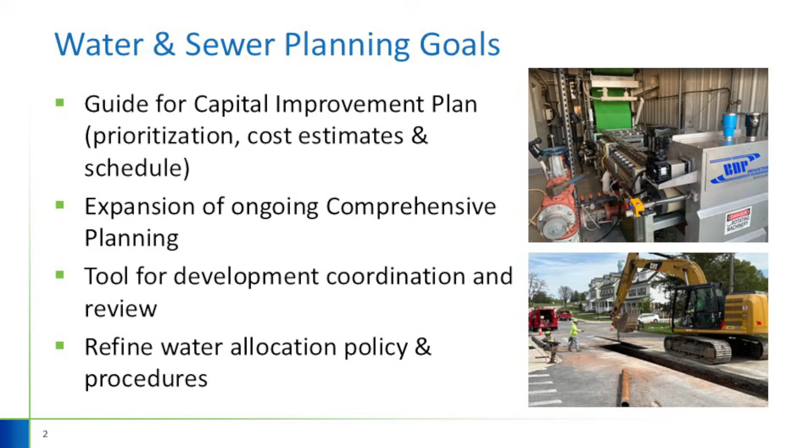Again, this gets into slides you've seen before, but just a real quick history of the timeline. The wastewater treatment plant's original plant was built in the 50s. The biological nutrient removal plant, BNR plant, was built in 2000, and then that was upgraded in the 2010s to ENR—enhanced nutrient removal limits—through the biomag process. That finished construction around 2016, and there were compliance issues soon thereafter. So there was a period from 2020 to 2023 where we were working with plant staff and other professionals to get the plant up to compliance and running as it should. I have more detail about that in a second. Most recently, there were the dewatering improvements to replace the belt filter press.

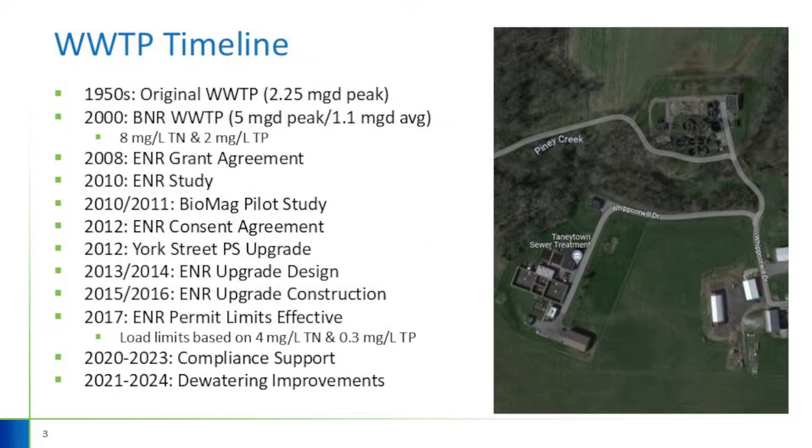Sorry, can we pause for a second? Yep, absolutely. I'm just trying to connect dots. So when you say the ENR load limits are based on 4 milligrams per liter TN, that's the nitrogen and phosphorus reports we get in our packets—that's what this is basically referencing, right? Okay, cool. Yeah, so the BNR had levels of 8 TN, total nitrogen, and 2 total phosphorus. That's the biological nutrient limit, a standard set by the state. All the plants have been required—major plants and now minor plants—to reach that 4 and 0.3.

So quite a big reduction from where they were, and it's starting to approach the limit of technology. I'm not saying it's at the limit of technology, but there is a limit to how far you can get with those. And operating an ENR level plant doesn't allow a whole lot of room for error. You got to be on your game.

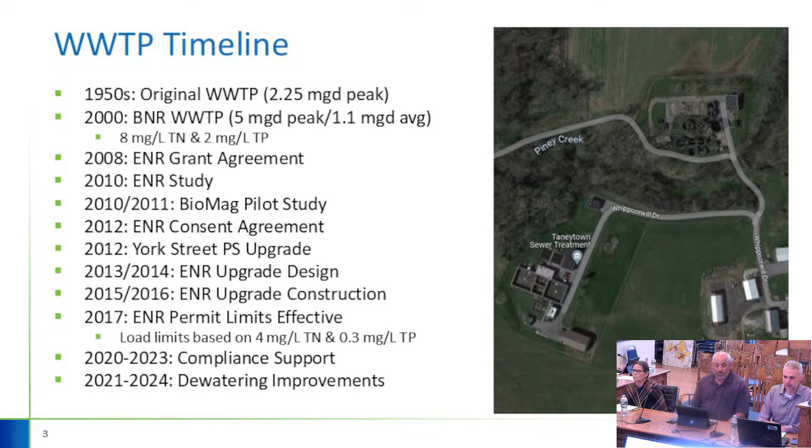Okay, so those compliance issues, and again, this is looking backwards. We looked at both items at the plant and then items in the collection system. It's the wet weather flows from the collection system that are one of the primary drivers for problems at the plant.

So you can see in the wet weather flows, minimum month is around 500,000 gallons a day, which is in the neighborhood of what the water production is. You can see though that the average daily flow was 0.8, and there was a max day several years ago of 5.2. So you can see the impact that wet weather has on flows to the plant, and then that trickles down, and then there's phosphorus and nitrogen difficulties as well. So really solving those problems in the collection system goes a long way to solving your compliance issues at the plant.

And I'll also point out that the load limits for total nitrogen and total phosphorus are flow-based. So even though it's an annual load that the plant is given, you really have to hit the concentrations of 4 and 0.3 if you want to make your load requirement for the year.

Sorry, can you go back? Sure thing.

Sanitary sewer system, terracotta and PVC, long-term issue since the 80s. Can you expand on that? Like, what are we talking about?

Yeah, absolutely. So a lot of the downtown area, older parts of the system were built with terracotta pipe. That's what was constructed in the 50s and 60s. And clay pipe, kind of picture like drain tile type pipe, it's brittle. I've heard rumors that the pipe used in Taneytown wasn't even glazed properly. I don't know if that's true, but it would allow water to kind of get through it. But mainly it's the cracks. It's just brittle, and so that has been an issue that's faced the city since the 1980s.

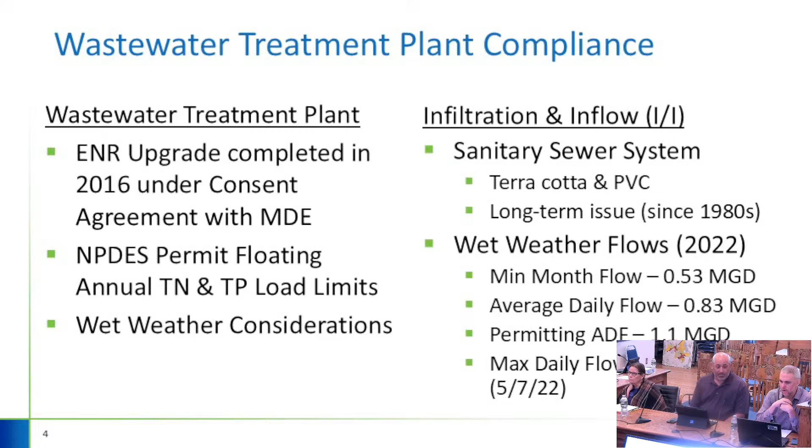These were some, I'm not going to read through all these, but there were a number of initiatives at the plant specifically where we looked at improving redundancy, reliability of the plant, maintenance of equipment, making sure that we had spares, things like that, in addition to the work that was in the collection system.

At the time, we had replaced 2,600 feet of pipe and lined over 4,000 feet, and that's the terracotta pipe. And there's a slide or two that shows where all the terracotta pipe is in the city system, and it's a long-range plan and interest to line or replace all of it.

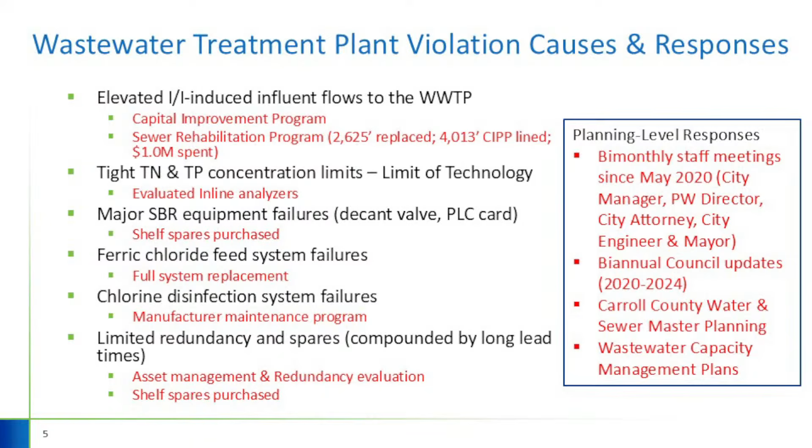These are the charts you were referring to, which you probably saw back in the January or February meeting. It showed how the plant staff effectively met the limit last year. Early in the year, when flows were higher, they trended right on the limit, but as the year went on and flows were lower, operations went well, and the plant ended comfortably below their limit for both nitrogen and phosphorus.

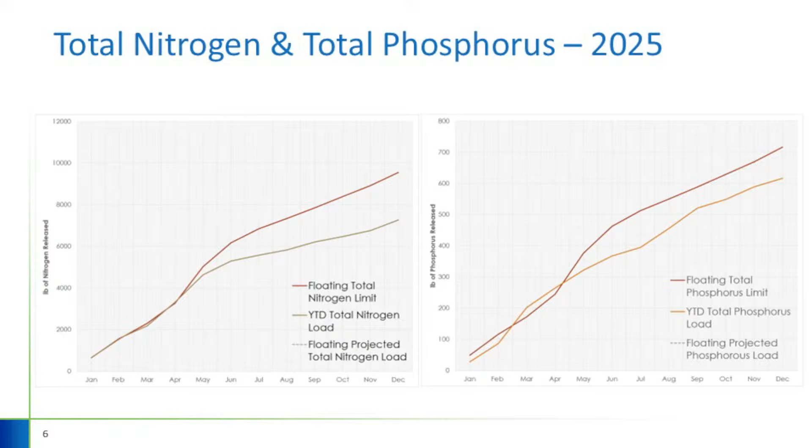So far this year, things are trending on permit pace, very similar to last year. This will be three years in a row now, 23, 24, 25, that the limits were all met.

We just submitted for an O&M grant through MDE. If you make permit, you apply for it, and per size of plant, in our case we'd get $33,000 back. It's based on which plants do how good, so we met, but we still may not get that money. It's been submitted this week, and we have until June to get it in.

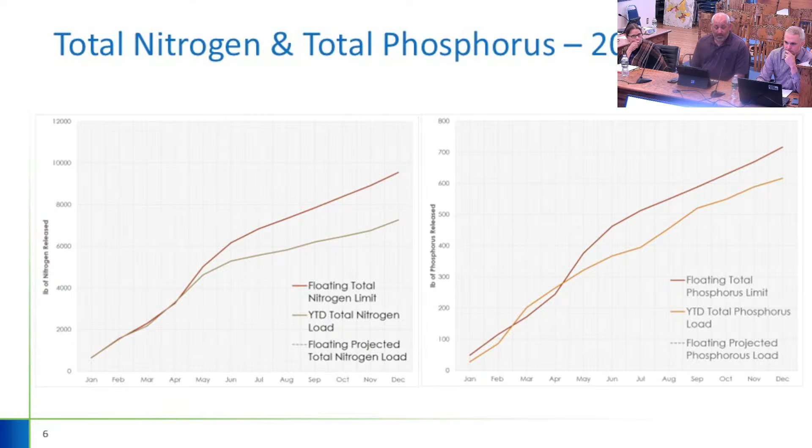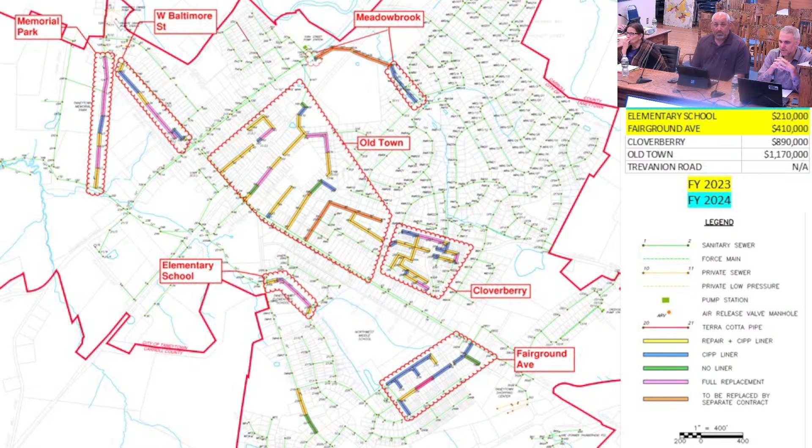This is the terracotta pipe rehab figure I was referring to. These were all the project areas identified, all the terracotta pipe that was identified. A number of these areas have been completed. Meadowbrook, in the top right corner, shows the projects as we broke them out. They were prioritized based on the level of I&I they were thought to be contributing.

The higher contributors, and also the easier projects to tackle, were at the top of the list. Meadowbrook is kind of low-lying by that drainage through there, and we found a lot of leaks that were repaired. Same deal around the elementary school. Those projects were completed. So what's left is what we call the Old Town area, places like Middle Street, George Street, and Cloverberry, which is tight and will be a challenging project when that comes.

There are projects that still need to happen, and that are to some degree in your capital improvements plan, I believe. Is that right, Jim? Old Town and Cloverberry are yet to be done.

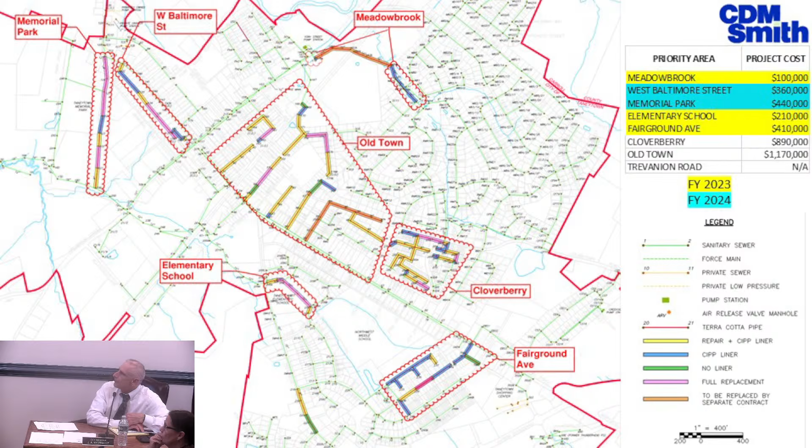We've done the Memorial Park Interceptor. West Baltimore Street was also done last year, and Fairground has had those point repairs done. But the part with Old Town to replace by separate contract, that's what we already did with the ARPA, right? Some of it, yeah, Roberts Mill Road and Broad Street. We still have Middle Street, George Street, Franklin, and Antrim Street.

Does the figure for Old Town still count the part that we've done? In the capital improvement plan, it would not. Okay, I suppose in this case, this figure does, it's shown in there.

Are we seeing any kind of increased water loss year over year with this system? Yeah, we definitely see lower flows, but it's still out there. It's a notoriously difficult item to track because there are so many factors, the actual flow, the groundwater levels. You can't just say a 2-inch rainstorm will have the same effect, because conditions are always different. It's a hard thing to track, but it's been a while since we've done flow monitoring, so it would be a consideration to maybe do a flow monitoring study to compare back to what was done five or six years ago.

My concern is increased expenses year over year from water loss, as well as if you're repairing it versus replacing it, you're just pushing it down the road. So if we have water loss, that would obviously be a concern for our residents.

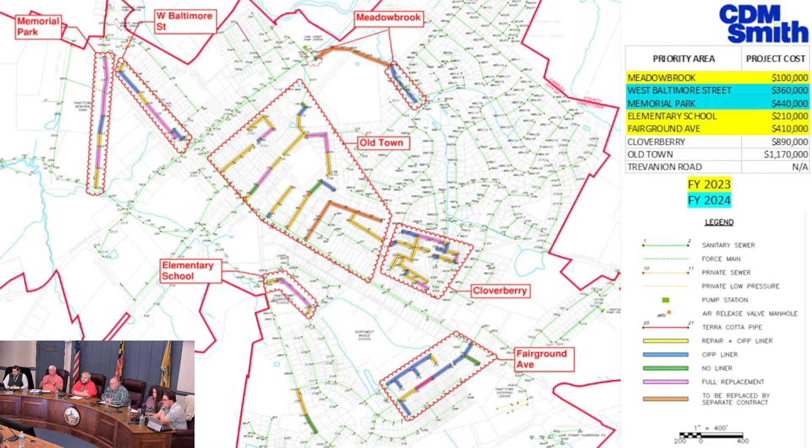Cloverberry is going to be close, because the sewer line mains in those properties are within 10 feet of the townhouses, so we're extremely tight with space there.

As long as the line is acceptable, because we'll do a survey and see if the line falls within the criteria where we do not have to dig and replace, we can use that liner. That's the other thing, we would rather line than dig and replace, it's a lot cheaper.

When we say line, just to clarify, it's the technology we've used to date that uses the existing pipe as a host pipe, and a membrane or resin-filled sock gets placed down into that line, inflated, cured, and then the pipe left inside the host pipe is structurally strong. The host pipe itself basically just becomes a host, it could break away and provides no reinforcement on its own.

Liner itself is structural. You guys hang on after the meeting, I will go grab a piece that was cured and cut out for testing. I have a piece in my office.

It actually looks like PVC. Yeah, because once it's done, I've seen a lot of videos of those being implemented recently.

Not to say it's a factor in some of these costs, but looking over the stuff we had on Trevanion, for instance, we had to tear down the fence to access some of that stuff in the back there. That's also an expense council has to remember—some of that stuff we do, we have to replace whatever we took down to do it. So those fences we have to replace add to the cost as we're going through the residential neighborhoods.

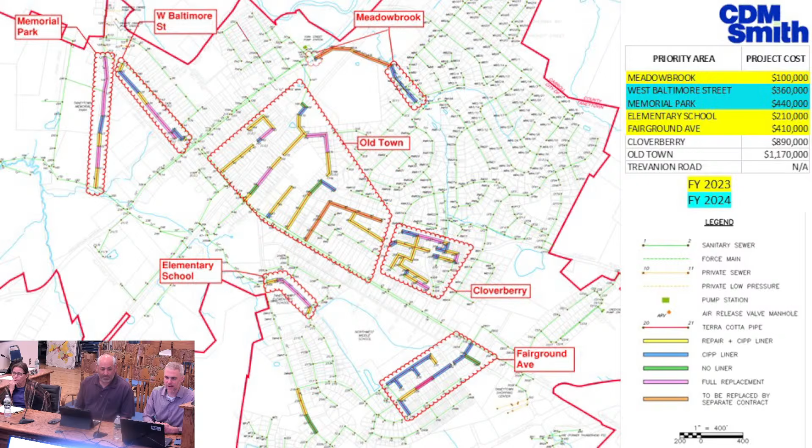All right, so we've touched on some of this already, but as far as thinking again back to the goals, from a sewer perspective - and this is kind of mirrored in that draft proposal discussed earlier - planning considerations around sewer would be around plant capacity, so looking at growth areas and the impact on the plants, looking at I&I, all those sort of things - what does the plant capacity look like?

Effluent reuse is something that's come up a couple times, just lightly, in conversation. The idea there is it's water reuse - higher level treatment for potential other uses of your effluent other than discharging it down the creek. Maybe that's something the city is interested in. Any water that doesn't go down the creek also doesn't count against your permit, your load for nitrogen and phosphorus, so that's an added benefit.

What are we talking about here? The idea of your wet effluent, so that's what leaves the plant. You can reuse that in some areas of the country where they use it for drinking water, fertilizer and all kinds of stuff. Use it for golf course irrigation, park irrigation, industrial uses.

There's indirect ways you can reuse it for potable water. Indirect potable reuse, if you want to go really far, not too Westminster. Yes, that's what I thought we were talking about, but I wanted to make sure I was on the same page.

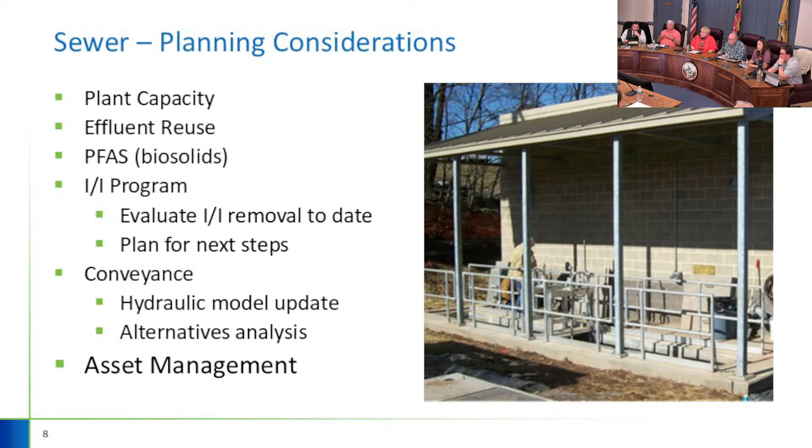I'm gonna tell you, you're gonna see some coming right from runoff and stormwater. When you're using nonstick pans, older pans that are scratched, you're getting PFAS from your clothing, your water bottle - the Teflon stuff, yeah. My water bottle has it, so.

Yes, everything has microscopic amounts going in from everybody's home. I mean, it's in everything you have, every product you have. But there are limits, and there are some in the wells.

I mean, one of our wells has been turned off for almost 4 years now because it exceeded the limit. So that's part of the projects we're doing now.

We have grants for putting treatment on 3 of our wells. I know the one we talked about is the one that's been off. Well 12 is going to catch because Well 11 is where we're putting both of those, getting treated at the same site, yeah.

The grants that we have there are principal forgiveness, so we're just going to be paying interest on it. So they are giving money, but we're paying interest for 10 years, and after 10 years the principal disappears. So it'll show on our books as a loan, but after 10 years that will go away. We're just paying interest for those 10 years.

Again, is that locked in? Like, there's no chance of something happening at the state level? They're not awarded yet, right? But those two grants are.

So they're contract bound, that as long as we do our part, they do their part? I don't think we've got to - we have not, we are working on an RFP right now with CDM Smith.

But I guess my question is the part from the state, the principal forgiveness part - is that locked in? There's no chance of that being stripped down the road or anything like that? Has anybody taken a look at the wording language, I guess? I highly doubt it would, but you never know because of what's going on state budget wise.

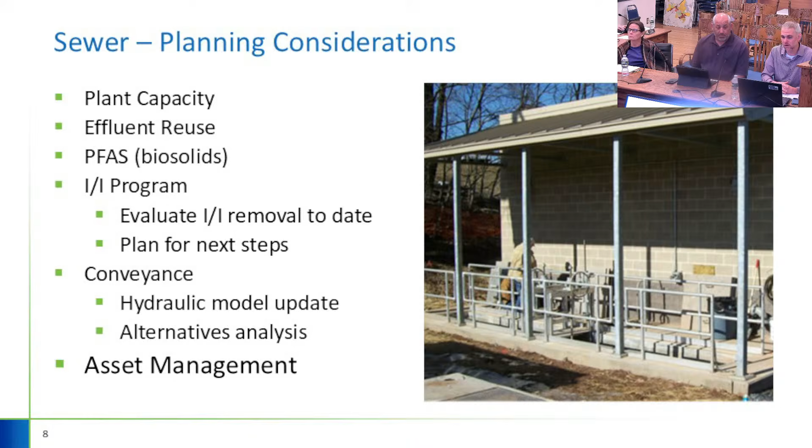Now it's half of that, which is great, and that's capacity that is now available for growth and for use by the residents, and you're saving money because you're not treating water that's being leaked.

One interesting note: pumped flow in 2009 was 504,000 gallons per day, and 15 years later it was only 457,000 - and that's even with the new development. A lot of development happened in between that period of time.

That's when Carol Vista was built, a lot of build-out in Meadowbrook - still building out, yeah. There was a lot of development in between there, and you saw flows come down.

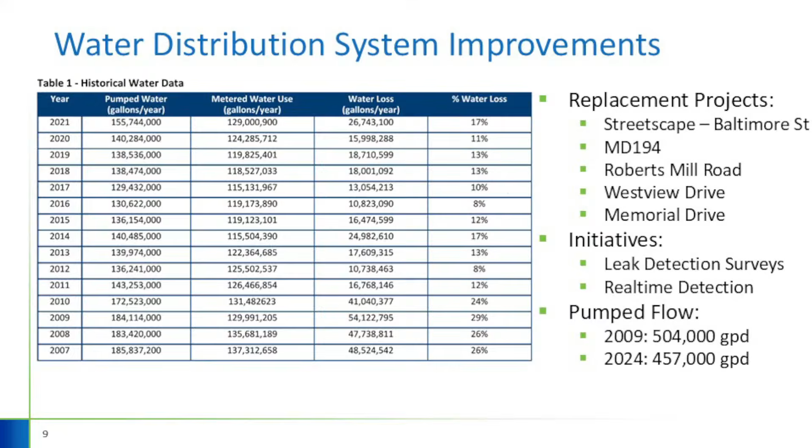And some of that is also new water fixtures - generally, utilities across the country are seeing higher efficiency water use coming down by gallons per person.

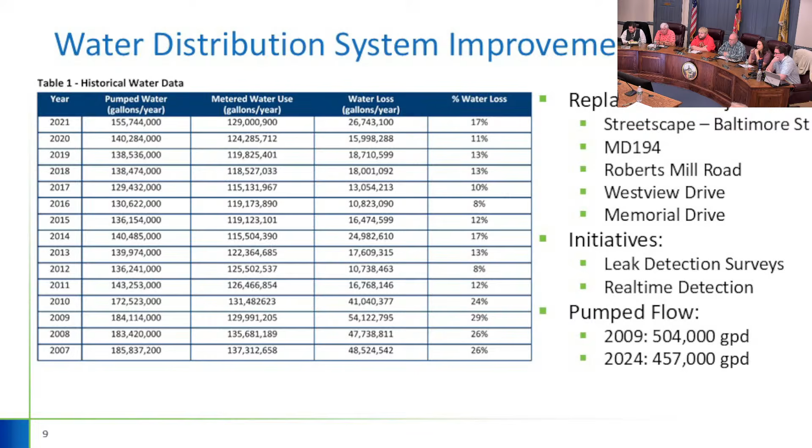Is that trend holding for the past 5 years? It's a little bit old, I should have pulled more. Do you recall your water loss numbers for the last couple of years? We haven't been as involved. You've been doing that. I think this year we're probably gonna be on the higher end, because we had some pretty significant leaks this year.

With this water loss, a lot of that we calculate in what we know was lost. So if we have a water leak, we estimate what we lost. Some of those numbers recently we were estimating low, but now we're starting to look at the pumps day to day. Instead of just saying we had a water leak and lost this many thousand gallons, we're actually looking at the pumps the next day, from this day to this day to the next day, so you can actively see how hard it hit, and say okay, when we see these numbers match, we can take that amount off and say this is what we actually lost at that leak.

So we're probably around 10, I can safely say between 10 and 15%. That's still pretty good, very average. It is still very good percent-wise. And the leak detection system, we're reading that twice a week now.

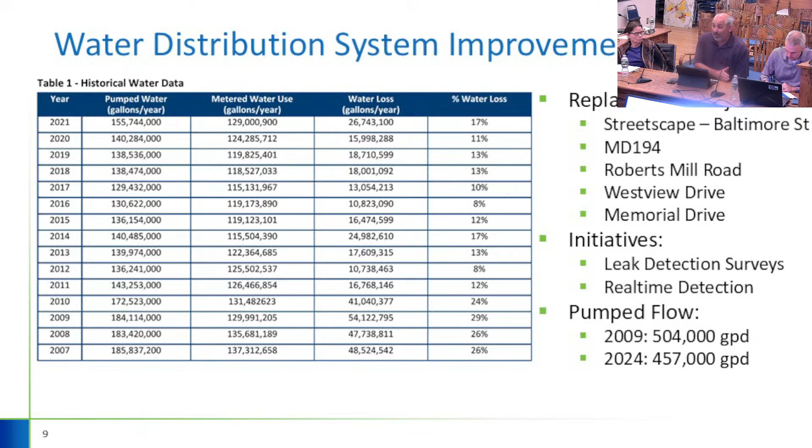On Monday we actually had a leak found on Carnival Drive up at the house. So we got a hold of the property owner. It was a property owner whose tenant was not at home at the time, but we shut it off and told the property owner they need to get this fixed, because it was actually infringing on their neighbors in the townhomes, where their property was saturated to the point you couldn't step in the yard. The tenant gets home and calls us saying you need to talk to your landlord, and they're supposed to be getting somebody up there to fix it, but that is water that we stopped from just losing and not accounting for.

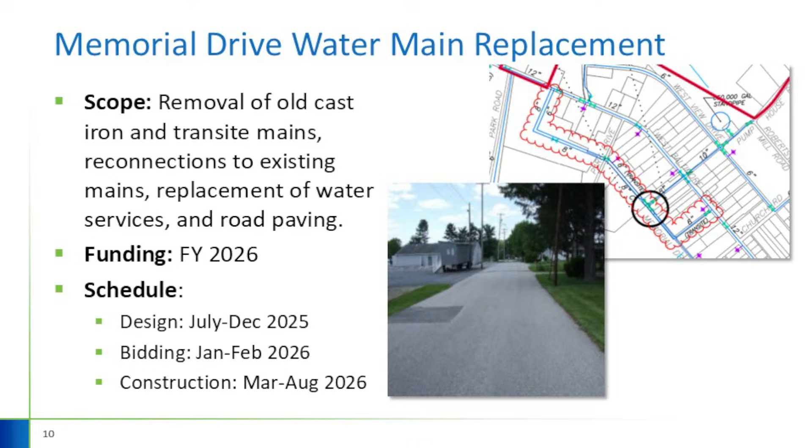I just want a quick answer on this since it's popping into my mind. I know we're doing the Memorial Park expansion and we've had the sidewalk stuff as an issue. When they redo this, is this where they were running that sidewalk as part of the Memorial Park expansion? No. Okay, I might be misremembering something.

Is that going on the other side, by Park Road then? Yeah, I thought it was on the other side of Park Road. The point of contention for the Memorial Park project and the State Highway Administration is actually along Frederick Street, where the new access point to Memorial Park will be. Just south of the St. Joe's graveyard is a strip of property that connects to Memorial Park that the city owns, and there will be a new access point there, with a sidewalk between that new access point and the church.

Real quick, small question. Since I sit next to two firefighters on the planning committee and hear about the fire stuff all the time - we brought this up last time - what's the impact on the carnival gonna be with this construction?

Construction runs March to August. We talked to the contractor about that and were very clear that they can't work that week, so they're gonna be working outside of that area. We told them anywhere inside that area near the carnival needs to start back, well away from it. The reality is the project, you can see that red highlighted area was the original project area. We learned through some test pitting using the city's vac truck that the conditions weren't what we expected.

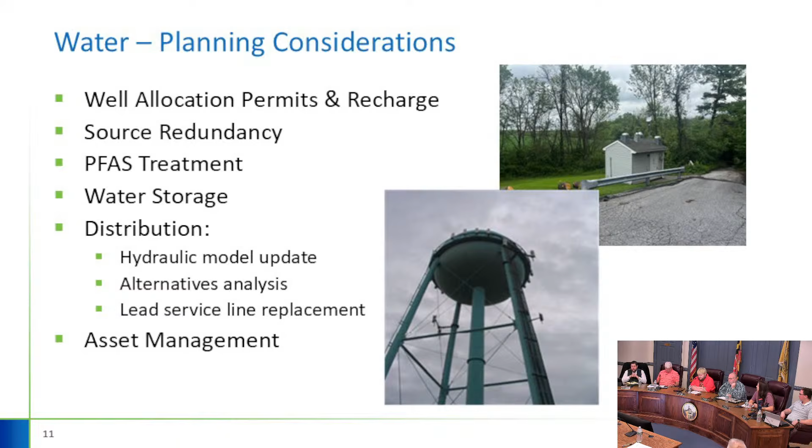Sheer curiosity question, I think it was last year the pipe on the side of the tower started spewing water. Was that the one up at the top with the little spout? Yeah, that was when it would overflow, almost like a relief valve, and it shoots almost to the Food Lion parking lot. That actually has been removed now, it comes down one of the legs and discharges on the ground.

Wait, you didn't want to see kids play in the little free waterfall? Hey, Timmy would love that, it's like a splash pad. I think that was a 4-inch pipe coming out of there, and that's the distance down to the ground.

I think that would hurt. Yeah, it'd hurt a lot. Put a nice little umbrella up where it goes. Running joke again, you got a Timmy splash pad. Oh, I know, kid. Oh yeah.

Before we move away from the storage vessels, just to the question about drought - when we're talking about an additional storage vessel, we're talking about storage equivalent for days of use, not to get us through a drought period. So this would not really have an impact on the drought condition. And Maryland, much of Maryland is still in moderate drought condition.

So it still may behoove us to put water restrictions on, just because we are so reliant on groundwater. Do we have any other solutions? We can't really fluctuate or store enough water. It's more of a regional problem - it's an aquifer problem, not just an us problem. That's kind of the thing, it isn't just us. It's pretty much everybody in the region facing the same kind of drought conditions.